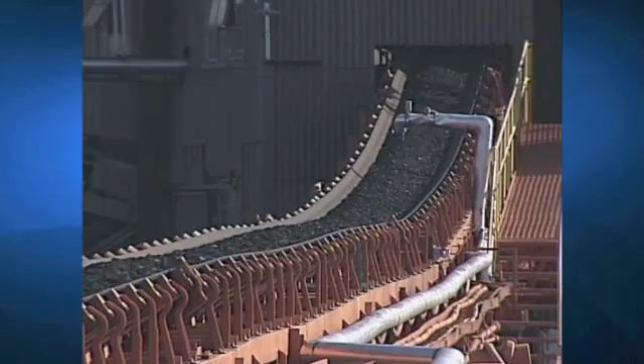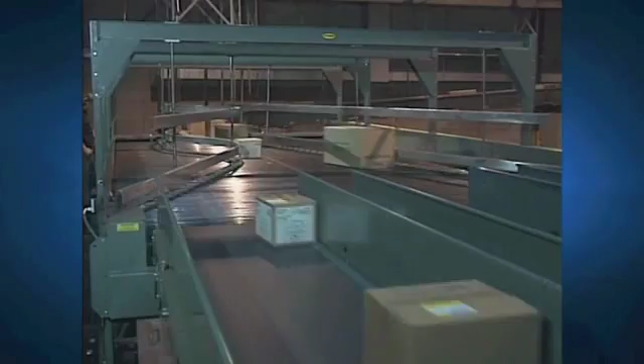Belts in motion, moving raw material and finished goods quickly and efficiently. The conveyor belt is the lifeline, the main link to industrial production. But a conveyor belt is only as good as the system it performs on. Properly loaded, well tracked, and operating on properly serviced idlers and pulleys, a conveyor belt will deliver a long, productive service life.

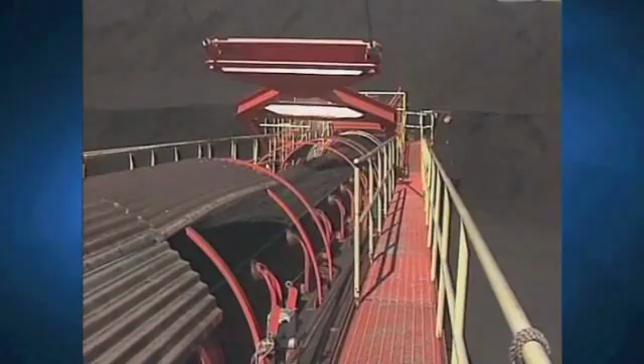A conveyor belt that tracks properly should be the ultimate goal for the conveyor user. To achieve proper tracking, certain practices are crucial. This program will focus on basic procedures that will help ensure proper belt tracking. The first segment will concentrate on the general mechanics involved in the tracking of all conveyor belts.

The second segment will focus on tracking issues for lightweight belts, meaning belts with a designed maximum operating tension of less than 160 pounds per inch of width. The third segment will focus on tracking issues for heavyweight belts, meaning belts with designed operating tensions equal to or greater than 160 pounds per inch of width. For more detailed information on belt tracking, consult the NIBA Technical Handbook.

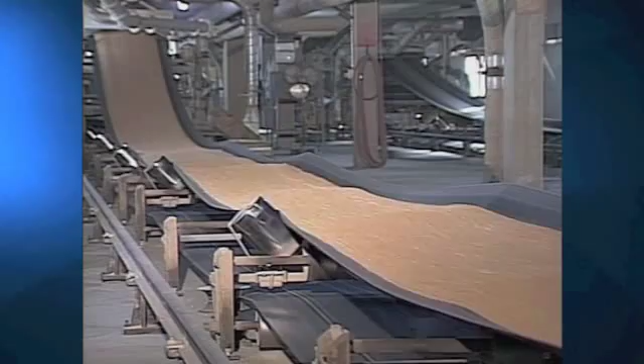Tracking is defined as the procedure required to make the conveyor belt run true when empty and also when fully loaded. This is also referred to as training. Conveyors which do not track properly cause material spillage, component failure, higher maintenance costs, costly damage to the conveyor belt itself, and possibly a total shutdown of the system.

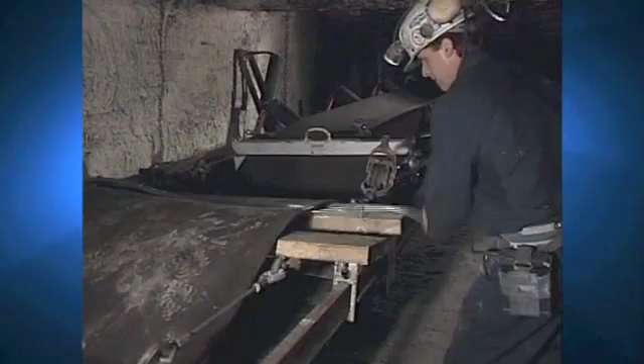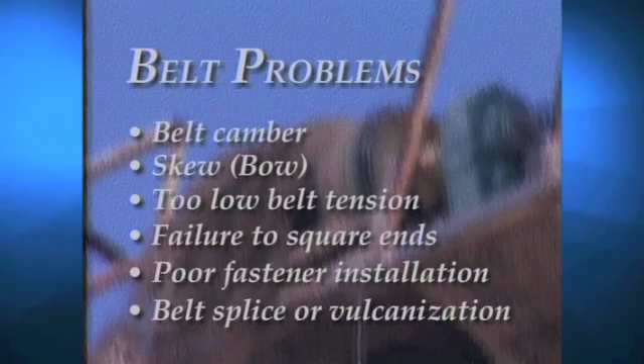When a conveyor belt is installed, problems of design, manufacture, erection, poor workmanship, and normal tolerances become apparent. All too often, these problems are considered belt problems. The belt may well be at fault. Belt conditions that contribute to mistracking include belt camber, skew or bow, too low belt tension, failure to properly square the belt ends, poor installation of mechanical fasteners, or an improperly executed belt splice or vulcanization.

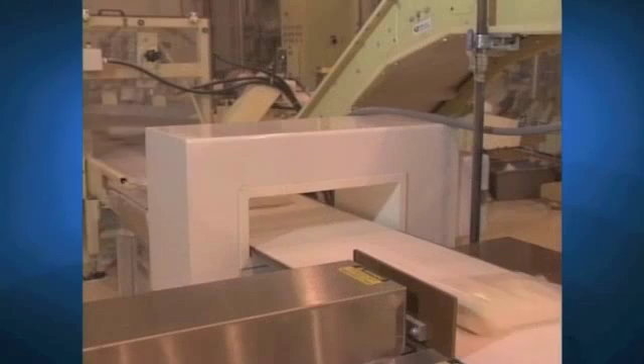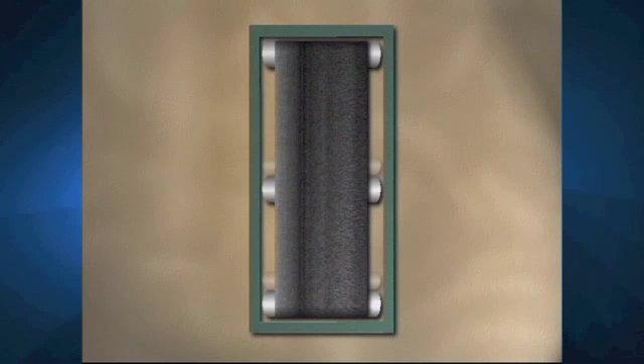However, a mistracking belt is more likely reacting to a structural defect or maladjustment in the system. Therefore, the problem of tracking should be approached as much from a systems point of view. One fundamental condition must exist for a conveyor belt to track properly. This condition is a square conveyor system. The support structure, pulleys, snub rollers, carrying idlers, and return idlers must all be square with the frame and parallel to each other.

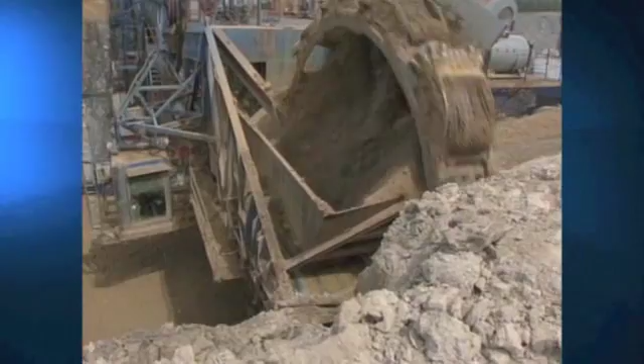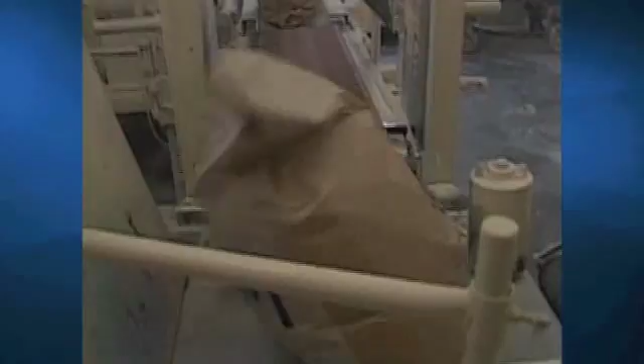Another very important aspect for proper tracking is the possibility of material buildup. Excessive material buildup on rollers will cause tracking problems to develop. The cleanliness of the system is therefore critical for good tracking to take place. Tracking the belt is a process of adjusting idlers, pulleys, and loading conditions in a manner that will correct any tendencies of the belt to run other than true.

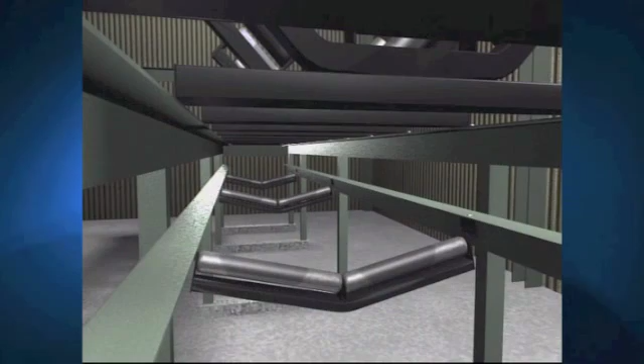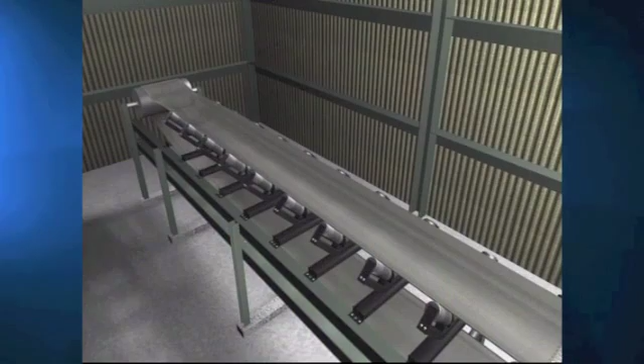A normal sequence for belt training is to start with an empty belt and begin with the return run working toward the tail pulley, followed with the top run in the direction of belt travel. Tracking adjustment is done while the belt is running and is concentrated over a length of the conveyor preceding the region of trouble. The priority should be given to adjusting idlers first, followed by adjustment of pulleys and snub rollers.

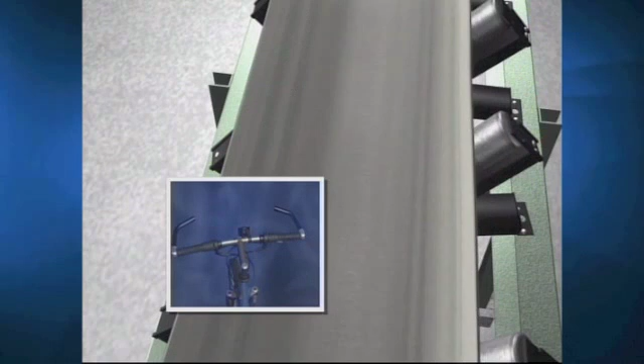There is one basic rule to remember when training a belt. The belt moves toward that end of the roller or idler it contacts first. Training a belt by adjusting one or more idlers is like using the handlebars to steer a bicycle. Looking down the direction of belt travel, when you shift an idler as you would the handlebars, the belt will move in the same direction as the bike would.

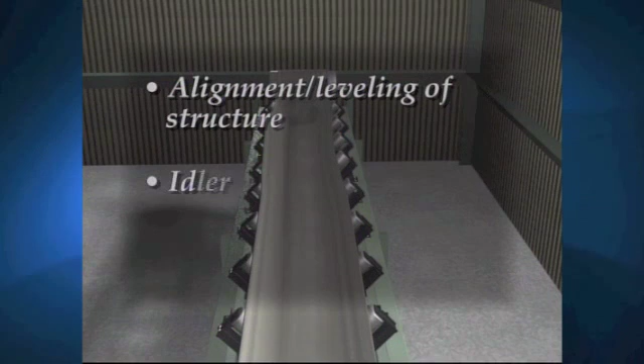The adjustment may not be immediately apparent, so permit the belt to run for several minutes. For longer belts, wait at least 3 full belt revolutions after each idler adjustment. Then determine if additional tracking is required. If the belt runs to one side at a particular point or points on the conveyor structure, there are three probable causes: the alignment or leveling of the structure, the idlers or pulleys immediately preceding that particular area, or a

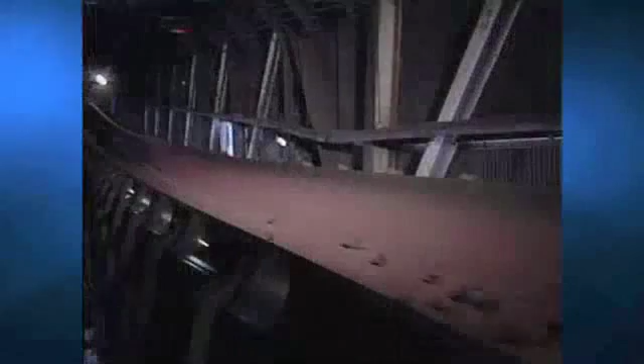combination of these factors. If a section or sections of the belt run off at all points along the conveyor, the cause is possibly in the belt itself. The belt ends may not have been squared properly, or off-center loading may affect the tracking. After the empty belt tracking is completed, run the belt with a full load and recheck the tracking. Ideally, loading should be done in the center of the belt.

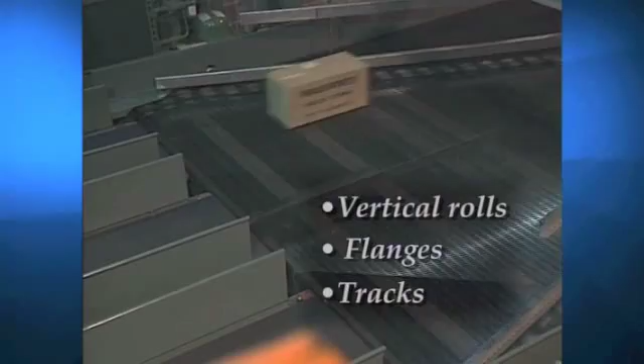Some conveyor systems incorporate equipment or arrangements to limit, correct, or forestall mistracking. The most widely used automatic tracking devices are movable guide arrangements. These include vertical rolls, flanges, or tracks used as guides. They are normally used with low belt tension applications.

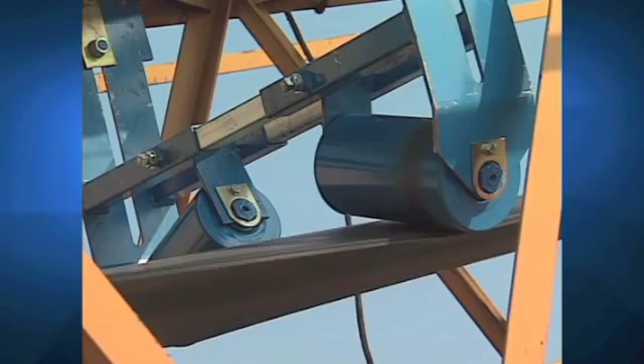Other devices try to detect mistracking when it occurs and then take corrective action. A variety of designs include optical, electrical, hydraulic, or pneumatic sensing devices to control actuators that tilt a roller. These arrangements are expensive to install and maintain. All the automatic tracking devices work under the handicap of being after-the-fact arrangements. Some preset amount of mistracking must occur before any limiting or correcting action is begun.

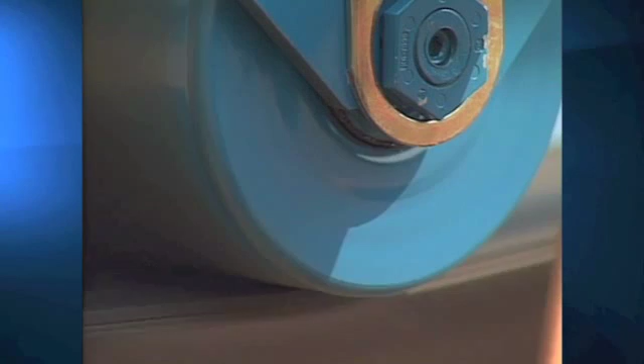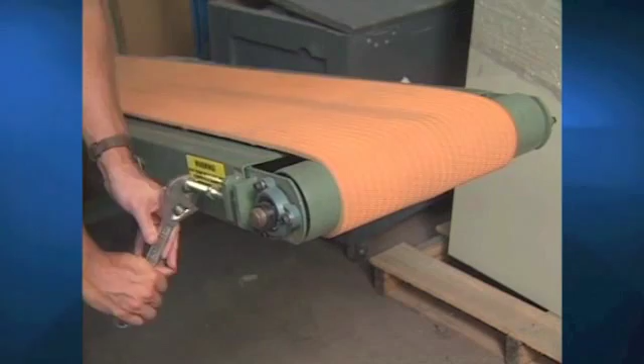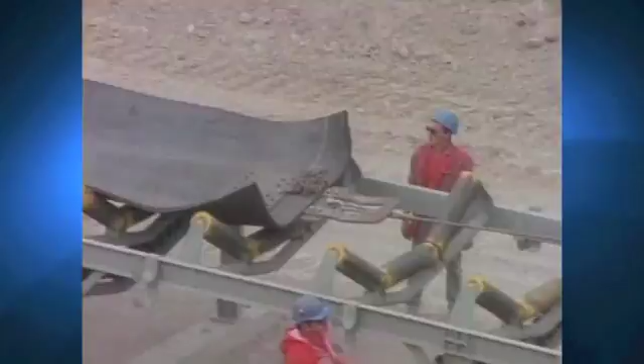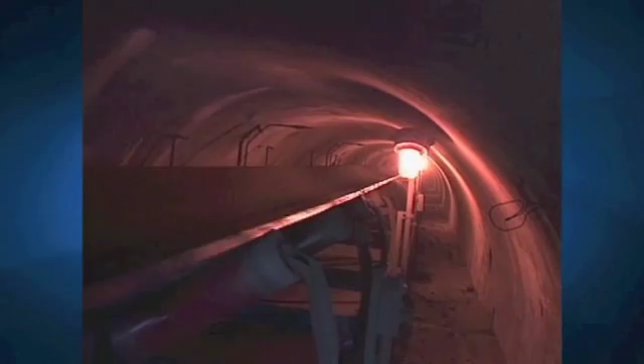One very popular solution to mistracking is the crowned pulley. Crowned pulleys are effective when used with low tension and very short conveyor systems, restricting their use to lightweight belts only. Heavyweight belts generally operate with a troughed roller arrangement. These belts utilize high-tension fabric and/or steel cord construction. The use of crown pulley arrangements can cause damage to high-tension belts and are therefore not recommended. Crown pulley arrangements will be examined in Section 2 of Belt Tracking, Tracking Lightweight Belts.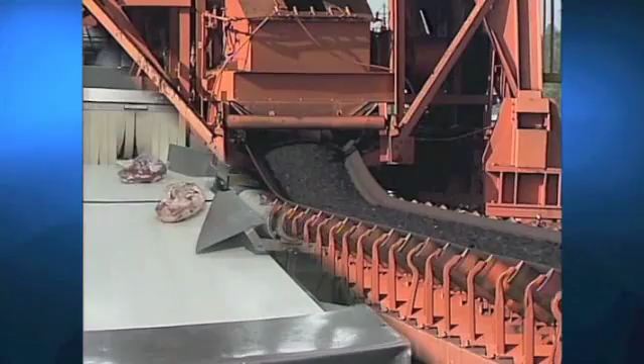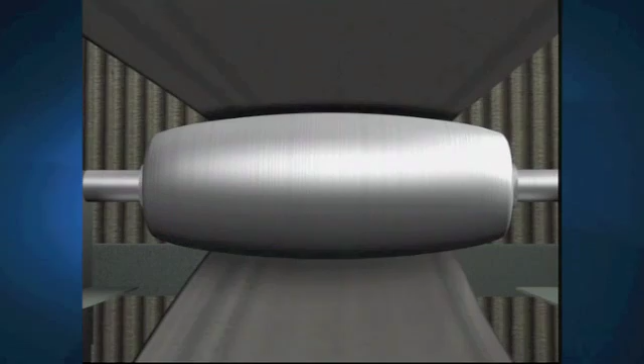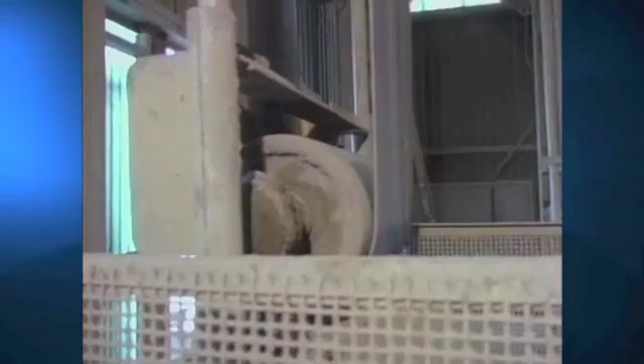Lightweight and heavyweight conveyor belts share many similar characteristics when it comes to belt installation and tracking. However, some factors are restricted to lightweight belting. One such factor is the pulley crown. A pulley crown features a larger diameter at the center than at the ends. The effect of this design is to direct the belt to the center of the pulley, thus acting as a tracking device. Crowns are most effective in applications where there is a long span approaching the pulley. Head pulleys, tail pulleys, and take-up pulleys are best suited for crowns. The larger the pulleys and the higher the belt wrap, the more effective the pulley crown.

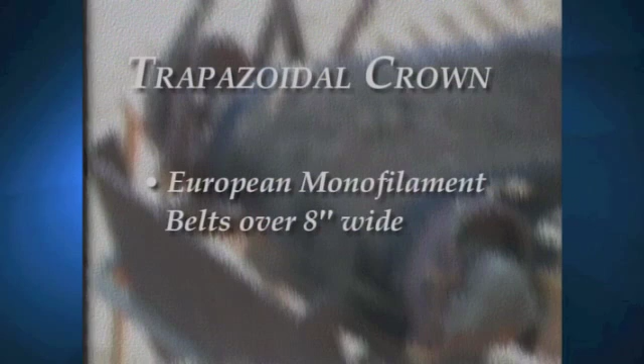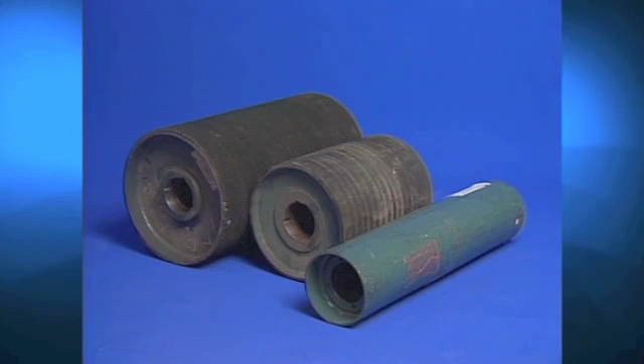There are three general types of pulley crowns. The radial crown is suitable for lightweight rubber and PVC belting, as well as European-style monofilament belts having a width of 8 inches or less. Trapezoidal pulley crowns are best suited for European-style monofilament belts over 8 inches in width. Apex or hip crowns put unnecessary stress on the center of any belt, contributing to shorter belt life. This crown design should be avoided. Recommendations for crown geometry differ slightly between belt manufacturers. For more information, consult the pulley and belt manufacturers.

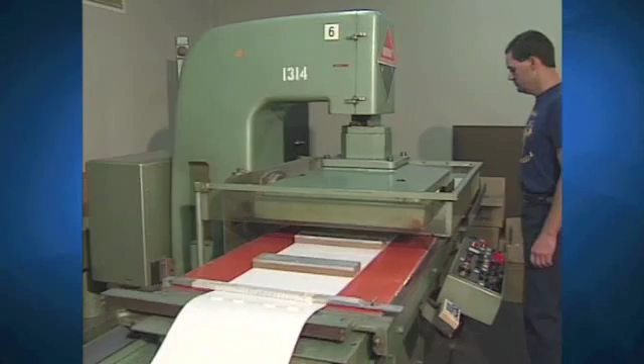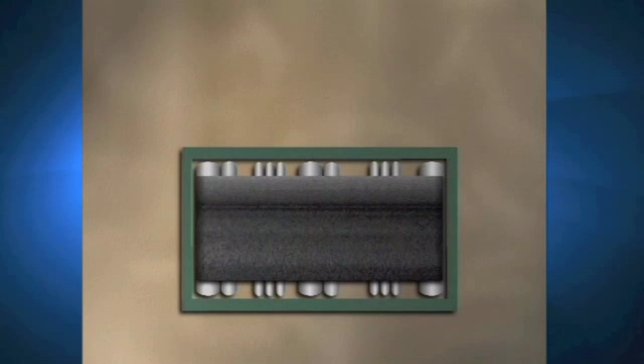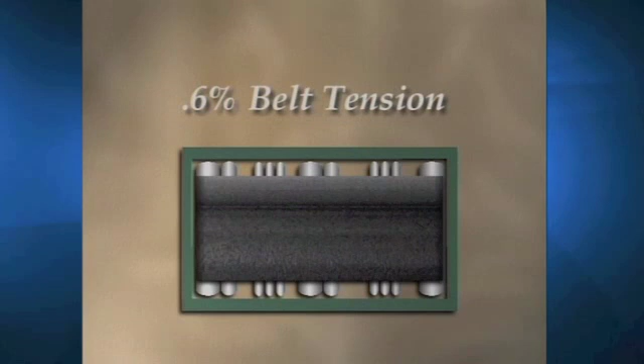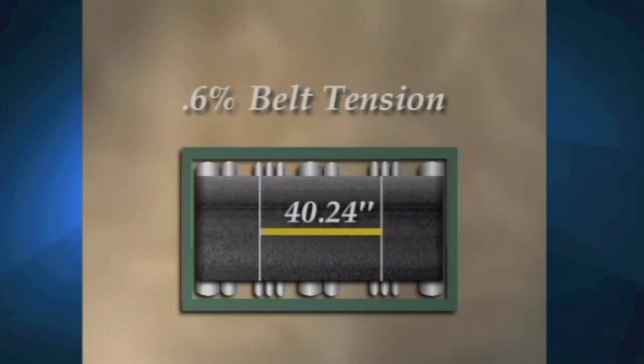Another important factor that is specific to lightweight belting, particularly European monofilament belts, is proper belt tension. To get proper tension, a very simple method is used. First, determine the correct amount of tension. In this example, we want to achieve 0.6% belt tension. With the belt installed and without any tension, make 2 marks on each edge of the belt, a measured distance apart. In this case, 40 inches apart. Slowly and evenly start tensioning the belt until the marks have stretched apart to the predetermined amount of tension. In this case, when the marks have stretched to 40.24 inches, the entire belt has 0.6% tension on it.

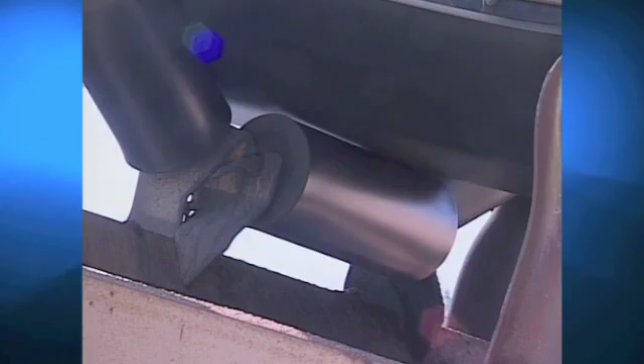Heavyweight belt applications present certain training needs that are not found in lightweight applications. One such need is the training aid. Training aids such as self-aligning idlers, edge guides, and limit switches act as a form of insurance against severe training problems that go undetected. These training aids are temporary because they affect basic training problems that should be corrected immediately.

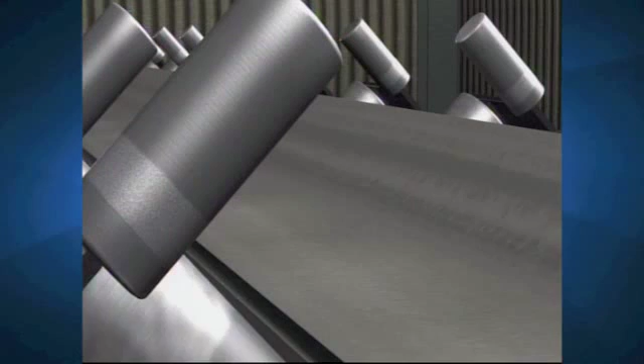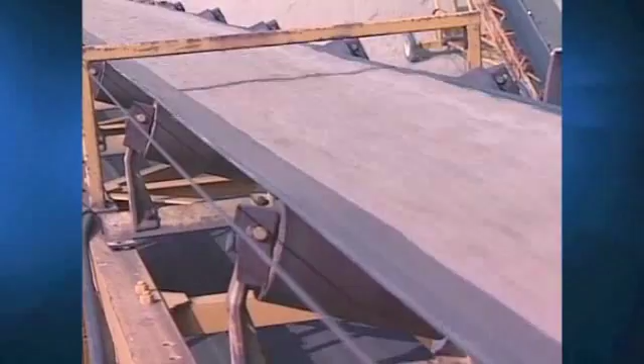The vertical edge guide is a popular training aid that places spools or rollers a few inches from the belt edge. Rather than prevent belt wander, they perform a damage control function, allowing the belt to strike a rolling surface rather than a fixed surface. The guides tend to wear off the belt edge and cause ply separation. Therefore, persistent contact is undesirable, and the source of the problem should be located.

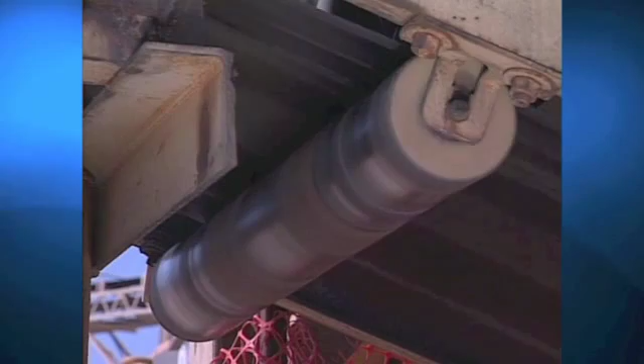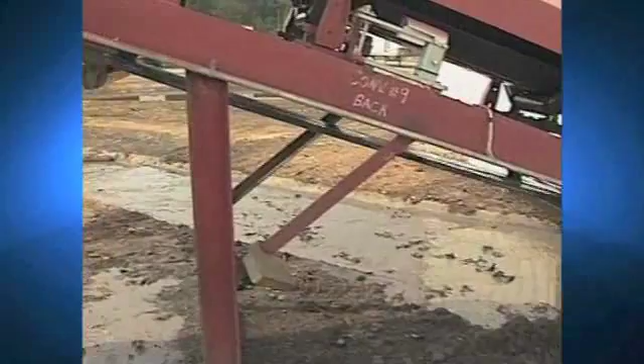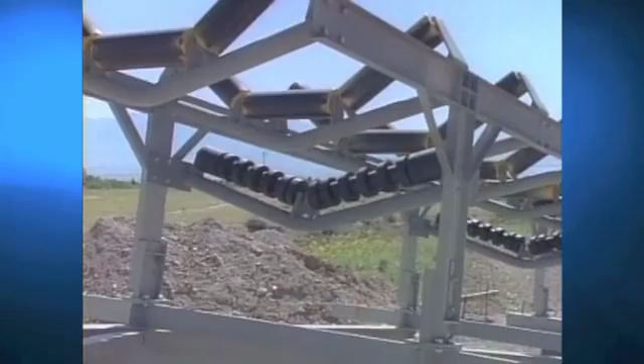Another important training aspect for heavyweight belts is the return idler. Usually, the troughing idlers on the carrying side exert a natural training influence and are generally sufficient to maintain belt position. The return side presents the most serious condition for belt damage due to its confined position within the structure. Of the different types of return idlers, only the V-return idler exerts a positive training influence on the belt. This idler offers constant belt contact and is highly recommended on conveyors over 500 feet in length. The other return idler types, flat and spaced disc, offer no training influence but are acceptable with additional training idlers as needed.

The spaced disc idlers should have 6 to 8 inches of solid ends. This is necessary to prevent trapping the belt edge between the discs. Another factor common to heavyweight belts is material buildup.

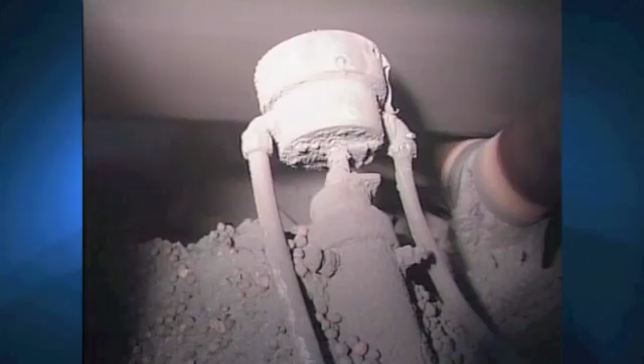Excessive material accumulation on idlers and pulleys will simulate components that are out of alignment and actually act like a crowned pulley. The belt will try to center itself over this crown, causing belt wander. Buildup also causes unequal tensions across the belt width and is detrimental to belt life.

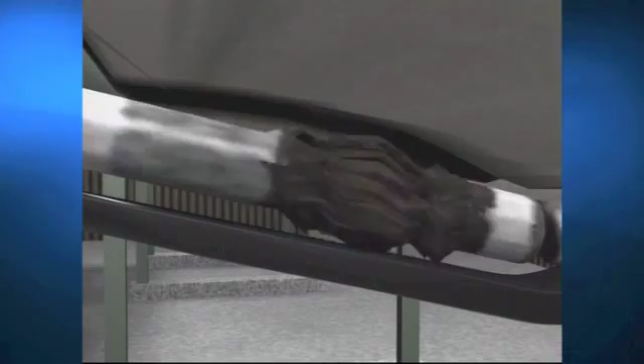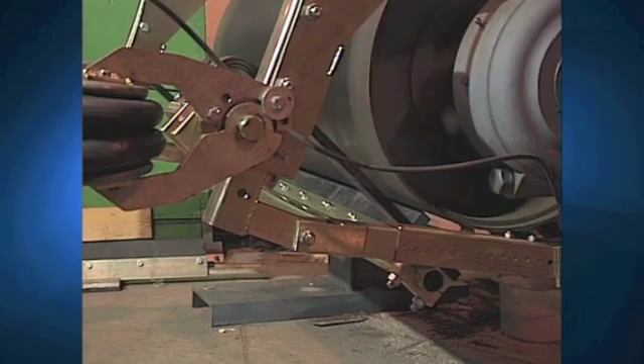Special care must be exercised to keep return rolls, snubs, and other pulleys clean. An effective multiple cleaner belt cleaning system should be installed to prevent material carryback. If necessary, belt cleaners can be installed directly on the snub and other pulleys. For more information on tracking issues specific to both lightweight and heavyweight belts and troubleshooting issues, consult the NIBA Handbook.

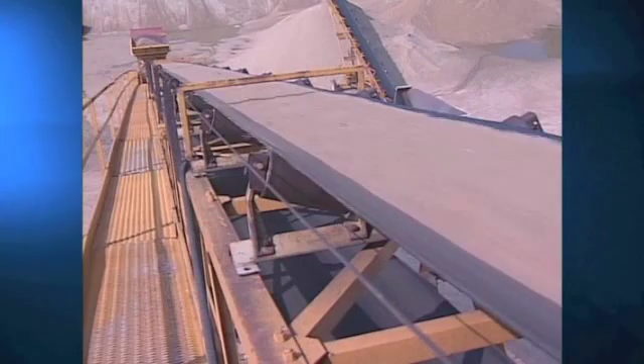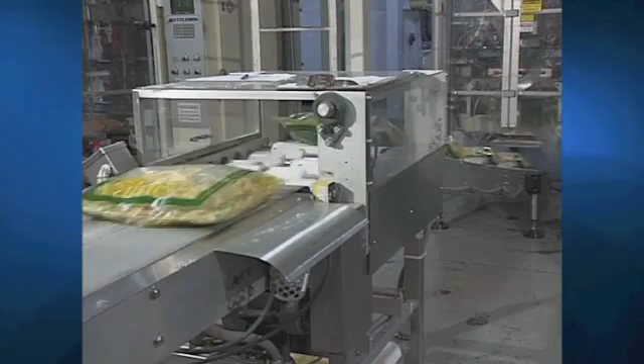As the cost of conveyor belts increases, the need for proper belt tracking becomes crucial. A belt that is properly installed and centered will deliver high performance and a long life to any application. Belt tracking, a key to productivity, a key to keeping your belt in motion.

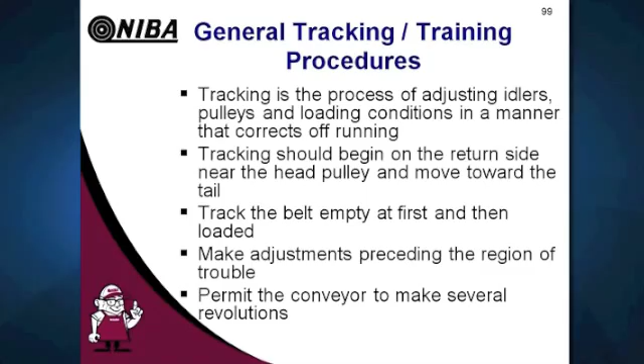Now it was interesting, they talk about permitting the conveyor to make several revolutions. If you're working on a 200, 300, 400 foot center conveyor, you probably have the time to sit and watch that run. But if you're working on an overland system or a mainline belt coming out of a mine, it'd take all night to watch that son of a gun go around 3 times. So you just watch it long enough to where you feel comfortable that the belt's doing what you ask it to do.

You set the idlers, you figure the idler you want to work with, you make the adjustment, you watch it run, you make a small adjustment. If it isn't enough, you make another adjustment and see if it pulls over. There is a point where you'll adjust an idler to the point that the belt will do strange things to you. So you just do it easy until you achieve what you're looking for.

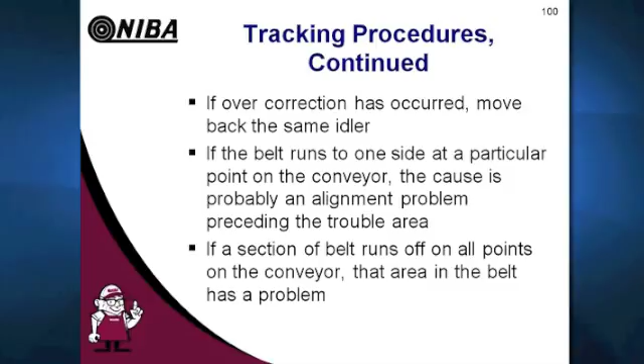And if you overcorrect, then just move it back a little bit. It's pretty simple. You can get a feel for where it starts to move out. So you start there and move it back a little. When you're comfortable with that one, move to the next idler. Move it up the idler sets until you get it adjusted to where you want it to be. Sometimes you can do it with one idler, but oftentimes it takes 2 or 3, maybe even 4 idlers to make the adjustments.

And if your system is seriously skewed, if it's not really in line or if it's kind of leaning on one side or the other, you may not be able to do it by adjusting the idlers. As far as from side to side, you may have to do some elevation on the side of the conveyor to lift it up.

Techniques of tracking: we use self-training return idlers, which is the safest type of idler to use in the system. If you have too much tension in the belt, so that the belt sits high up on the idlers and you can't get a grip on it, it's pretty hard to do it on the return side. You've got to have some friction to cause the belt to move. The other thing is if your belt's cupped and sitting up on those points, you've got to modify your system.

Self-training trough idlers. This is another one of those things where you talk to people, and some people are all for it, some people are against it. The fact is, a self-training trough idler has to sit higher in the system in order to operate. So it puts more edge stress on the belt. It can be a source of idler junction failure. So use them in the proper places and use them sparingly.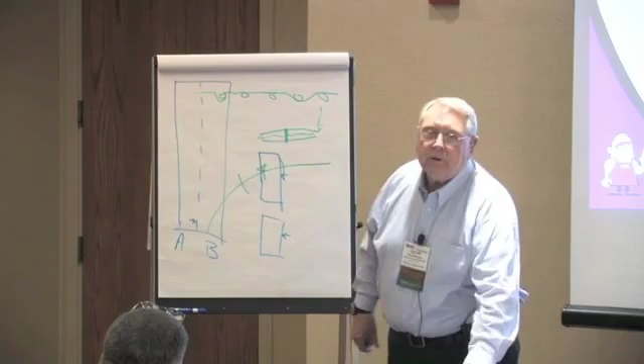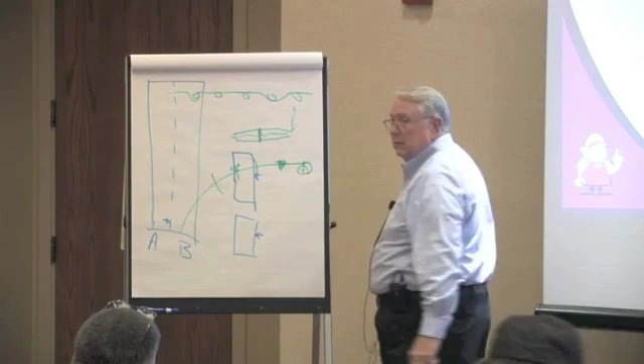Don't put it close to transitions. Think of those transition areas. You're going into your pulley here. You don't want to put it anywhere close to this transition area, for the same reason we've discussed earlier: that effectively shortens up the transitions. So be careful with them. You can put so many in a system that it can override the belt's capability for load support.

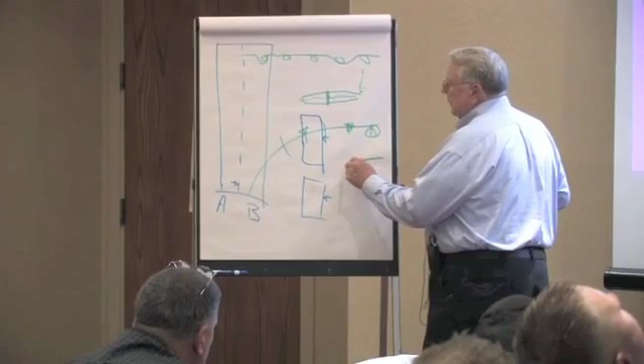We were called out to a grain elevator, and we were in the basement. This is a long system, about 1,000 feet on centers. And the guy says, I'm having a problem with my belt. It's failing on me. And we looked at the back side of the belt. You all saw what idler junction failure looks like. If we looked at the back side of the belt, it looked just like that. And you look at that and you can tell him what the problem is.

We checked these transitions. They were good. We checked several other things. But he had troughing trainers every 20 feet down the length of that conveyor system. And it eventually just wore the belt down. It couldn't take it.

Training devices on the return side. If the belt is cupped and you have a return side trainer that manipulates the belt by contact with the edge of the belt, you'll get very little, if any, response, and frankly, it's just going to get in the way. If you have a type of trainer that manipulates the belt from the center of the belt, then you'll have better success with a return side trainer on a cupped style belt. Reason being, on cupped belts you don't have a whole lot of tension left on the outside edges of the belt.

So truthfully, I've been in circumstances where I've been asked to facilitate training a belt that's severely cupped. You got that cupping on the return side, it's quite prevalent. First thing that I recommend to the customer is that they've got to figure out why the belt is cupped and replace the belt. If the cupping gets beyond a certain point, you might as well take it out because you'll never get it to run on return.

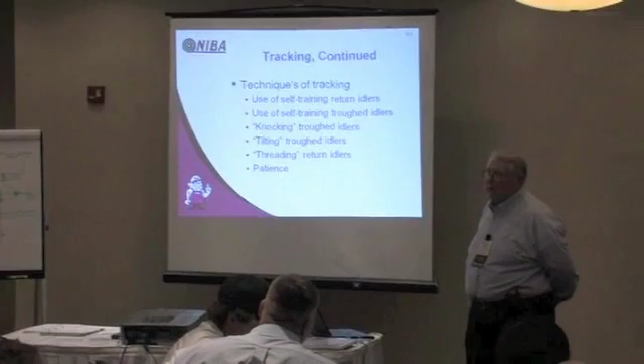It just won't work. Some of the other things we do, of course, we knock the troughing idlers. We've talked about that. Tilting is something we haven't talked about. If you have a belt that is too stiff to lay down in the troughing idlers, so that it sets up in that position where it's not making full contact.

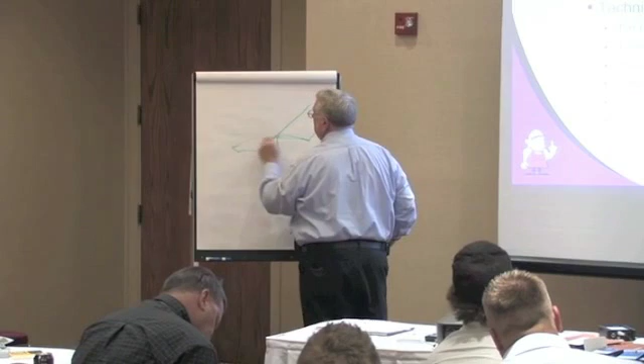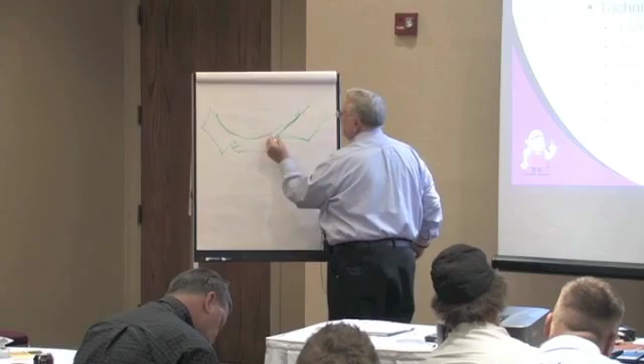So you have the troughing idler here. Well, that's a modified troughing idler. And your belt is hitting here, maybe a little bit here and a little bit here. If you don't have good full contact with these rolls, you can't trough it. Well, one thing you can do is tilt the idler forward in the direction of belt travel 2 degrees.

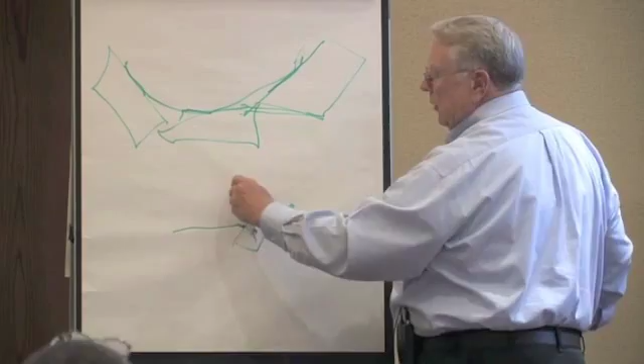And what that does is it forces the belt, it hits here, and the way the belt is set up, it'll push it down into the system. Now that isn't good on your splices, it isn't good on your idlers, it isn't particularly good on your piece of belt. But if you have a piece of belt that you can't get to trough, you can't get to train because of that, you can actually tilt those idlers forward and run it that way until you get the belt settled and then move it back to vertical.

Some idler manufacturers come with a 2 degree tilt in their idlers already. Most, though, I think nowadays are just straight up. Just stick a little washer or two in the back of them and you're in good shape. How many idlers do you need to tilt? I'd start with every 4th one, and if I need more, then I come back and tilt from that point. Once again, I think we need to impress upon everybody that these are recommendations that can be done. In the real world application, whether they're going to be done or not is quite a different matter.

You could convince a customer that 2 degree tilt is what they're going to need on, say, a stacker conveyor at a quarry application. I would think that you'd be hard pressed to get them to take out the shims once the belt's doing what it's supposed to do.

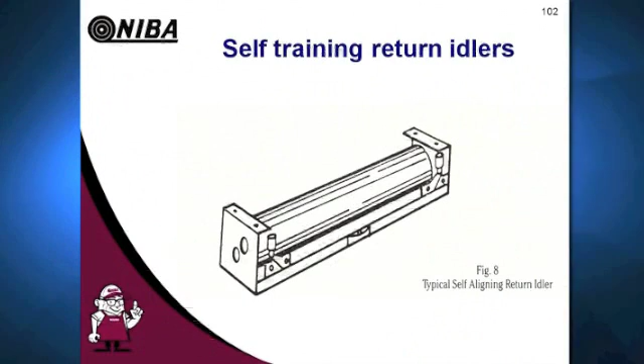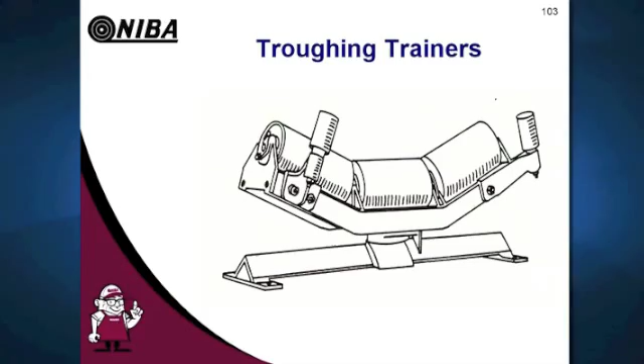Self-training return idlers, these are just troughing trainers. Now, if we were to walk out of here tomorrow and go to 15 sand and gravel plants, of those 15, probably 12 of them would have troughing trainers in their systems, and of those 12, maybe 2 of them would have troughing trainers that were really operating. The rest of them would be frozen up, not working, or tied off. I hate to see them in a system. They do sell belt, but they don't solve the problem a lot of times. So, use them sparingly and use them wisely.

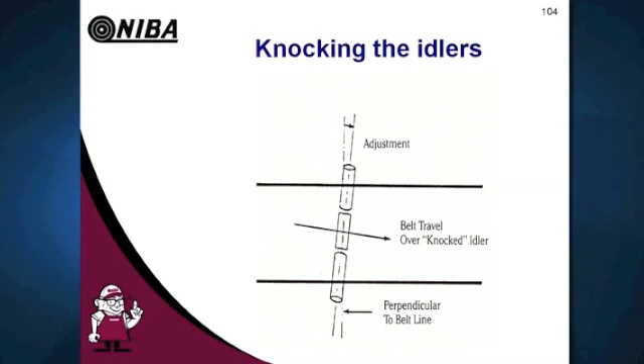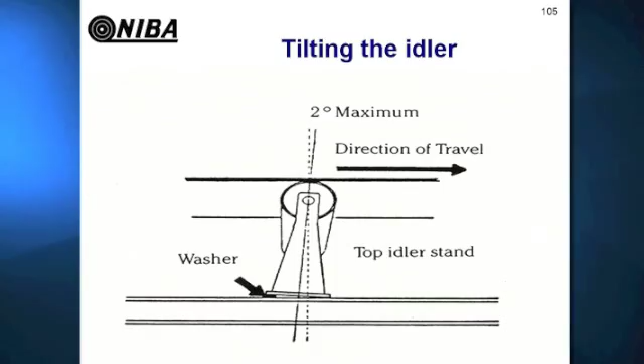We talked about knocking the idlers. Any questions about this? I think it's been covered pretty well. Tilting the idler, 2 degrees maximum. That just forces that belt into the idler. And like I say, if you can do it about every 4th. We had a power plant in Pennsylvania. Bless their hearts, sometimes engineers just will not listen. They'll design a conveyor system that's 4,000 feet long and have 200 foot of lift in it and design it 36 inches wide.

This thing requires a 750 pound working tension belt. Nobody in this country makes one that'll work there, but they insist they've got to have it. So then you modify your carcass a little bit to try to get it done, and invariably it jumps up and bites you. And so you run out and you do things like this to make it run for them so that they can run some coal over it and finally break it in and it'll work for them later. But this will happen, and we do it more than I like to talk about.

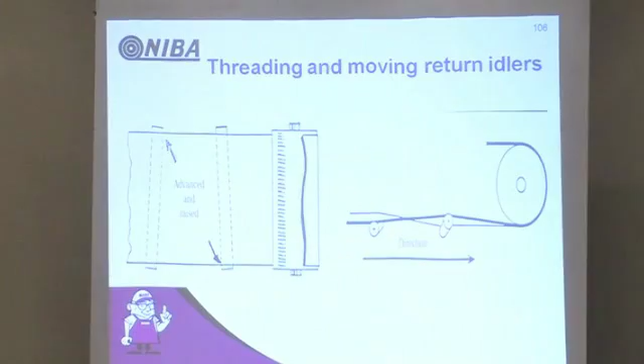Threading and moving return idlers. Remember now, we've talked about the threading part. Sometimes your system is just not level. So remember again, the belt runs to the side of the conveyor that it touches first, so it's perfectly legal then to raise one of those return idlers up in the system. So now you have a high point, something for that belt to run to. That's legal, logical, and works more often than not. So don't be afraid to move them not only horizontally, but vertically to get the results you're looking for.